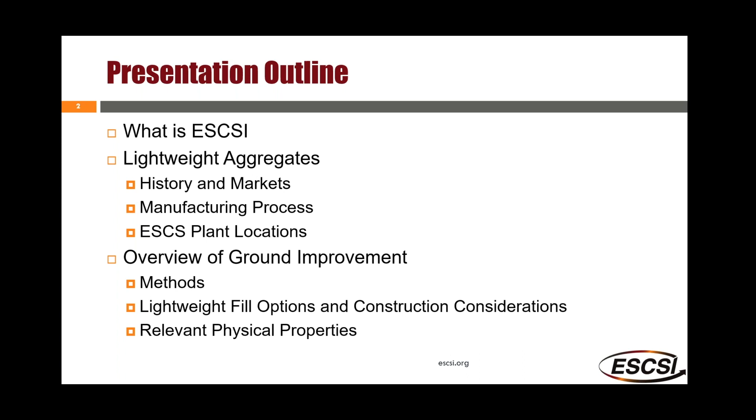The presentation outline consists of the following. We'll talk a little bit about ESCSI and what the organization is. We'll discuss lightweight aggregates in particular, their history, and the markets in which ESCSI members participate. We'll talk about the manufacturing process and show you a map with some plant locations. After that, we'll segue into a very general overview of ground improvement, the methods available in the market today, lightweight fill options available as tools to solve your challenging site conditions, and we'll talk about the relevant physical properties of each.

After that, I'll segue to David's portion, and he will give us an overview of the MSE market from Tensar's perspective. He'll talk about MSE structures, the types, spacing options, and specifically how a lightweight fill or lightweight aggregate can impact an MSE design if it's needed for bearing capacity or settlement concerns. So hopefully that sounds good to everybody.

A little bit about ESCSI. It's the acronym for the Expanded Shale, Clay, and Slate Institute. It was founded in 1952 as the trade association for manufacturers of rotary kiln produced expanded shale, clay, and slate lightweight aggregates. Its primary mission is to sponsor research and develop marketing and technical collateral used by engineers, contractors, and owners on the benefits of lightweight aggregate solutions. Many of our members are active in key organizations such as ACI and ASTM, with many participating on relevant committees within those organizations.

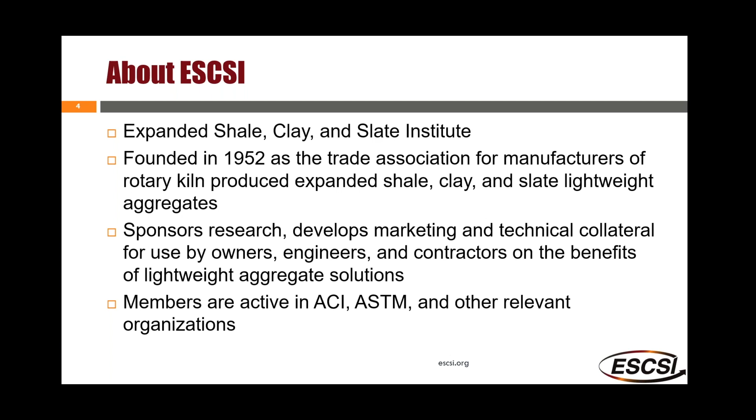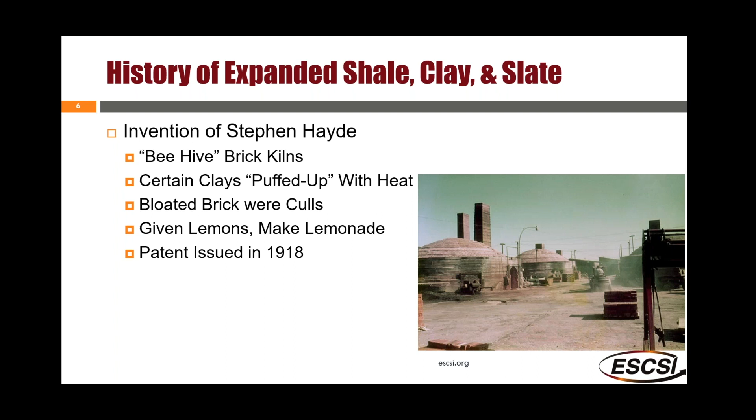ESCS material, or expanded shale, clay, and slate—I'll interchange those terms in the presentation—is an invention of Stephen Hayde. Its roots are in the brick industry. A little over 100 years ago, Stephen Hayde was making brick in a beehive kiln like you see here. Occasionally, when he took the brick out of the ovens, he would get something that looked like this. A bloated brick is not something you want if you're in the brick business.

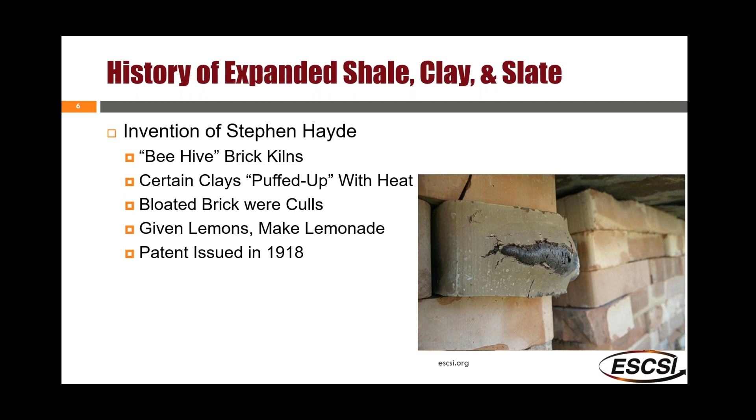So those were culls that he crushed and sold to local concrete producers. Ultimately, they found that the finished product made with the crushed, culled, bloated brick weighed less. So Stephen Hayde made some hay out of this, and he decided to intentionally make bloated brick, quote unquote, and created a method to do so. He studied time-temperature relationships and discovered that keeping the material stationary, like in a beehive kiln, wasn't important. He determined using a rotary kiln was the best way to make consistent product.

Over the years, there have been significant improvements to the process, with automated controls that now produce product with greater consistency, and not the least of which is much improved operator safety.

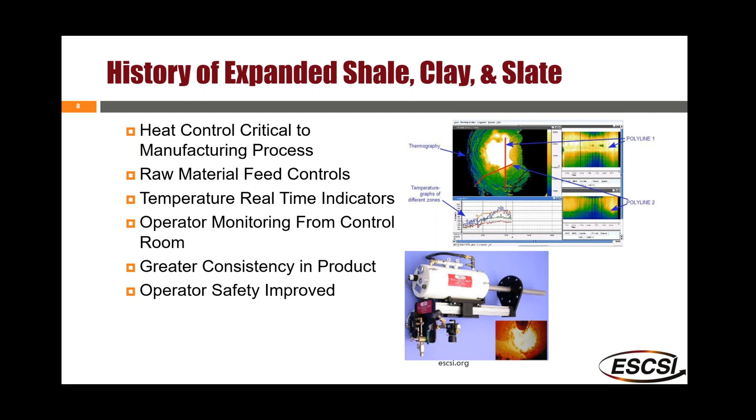Stephen Hayde received his patent in 1918, in the middle of World War I. At that time, he gave the U.S. government the rights to the patent so they could develop lightweight concrete for ships due to the shortage of steel at the time.

In World War II, the same thing happened. There was another steel shortage, and consequently, more concrete ships were produced.

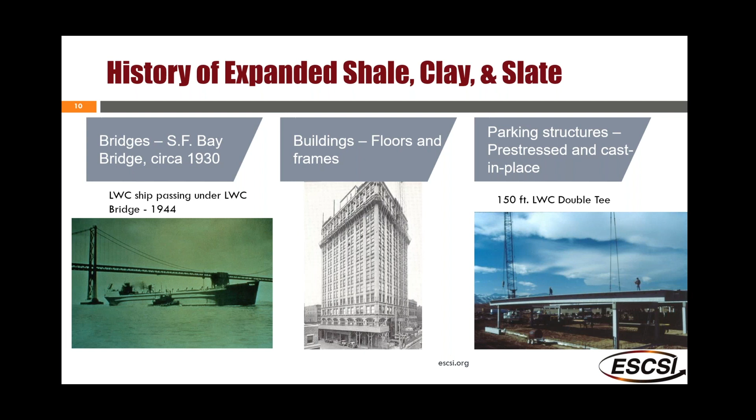Over the years, other markets developed. Concrete masonry began in the 50s, and today is still the single largest market for lightweight aggregate in the country.

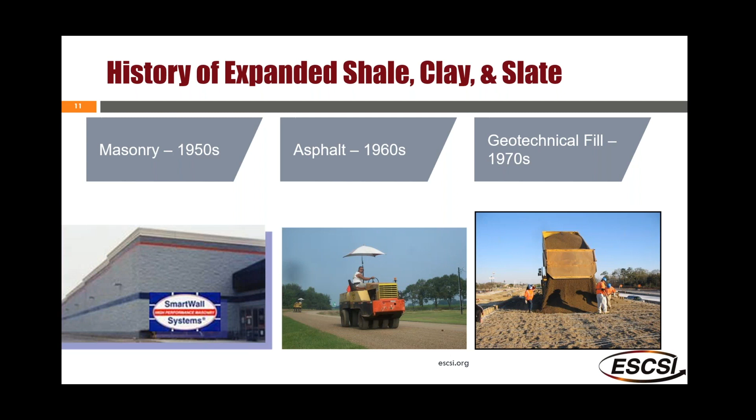In the 60s, it was used in asphalt applications and hot mix asphalt at that time, but today the primary asphalt use is for pavement preservation through chip seal applications. And in the 70s, it began to be used for geotechnical fill applications, and obviously that application is the focus of this presentation today.

So wrapping up this summary of ESCS traditional markets, a significant portion of the annual production goes into concrete and concrete masonry applications, where we routinely support the production of lightweight concrete mixes with very high compressive strengths.

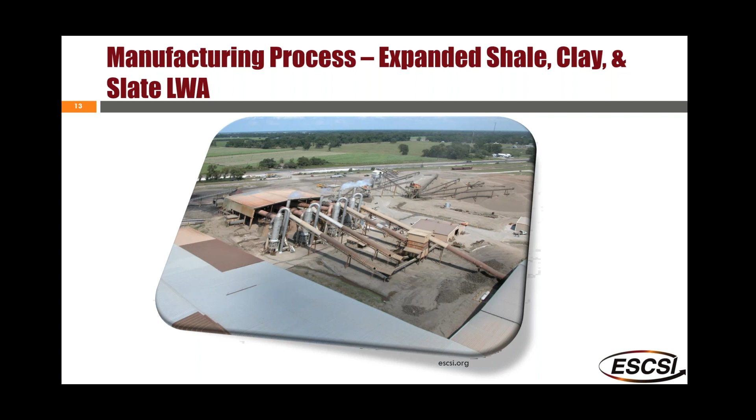Focusing now on the manufacturing process of expanded shale, clay, and slate lightweight aggregate, it's pretty straightforward. The raw materials are excavated and harvested, and they're typically brought to some sort of storage area that's usually covered to keep the material as much out of the elements as possible, especially in the wintertime.

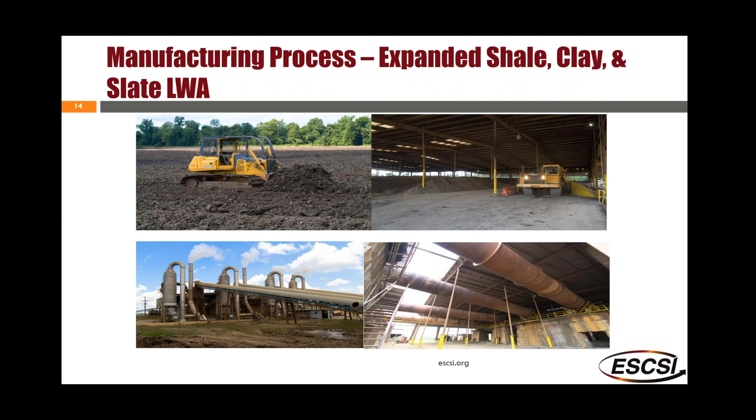At that point, it's fed into a series of conveyors that bring the raw material up to the entrance to the rotary kilns. This photo shows a shot of a typical 4-kiln operation.

Inside the kiln is where all the magic happens. The material is heated to around 2,000 degrees Fahrenheit. At this point, the material bloats or expands, and the particles end up with a lot of air voids inside, and that's what makes the product lightweight.

At the end of the process, you end up with a ceramic material that's very strong, durable, and environmentally inert, and has a low density as well.

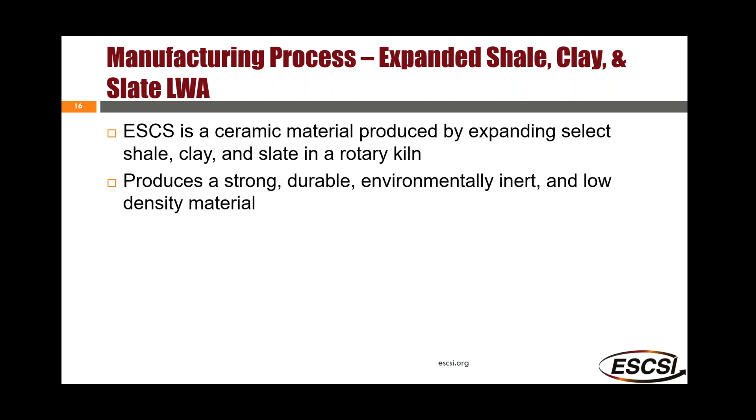All these products and methods and technologies are summarized in the Federal Highways Ground Modification Method reference manual. It's a free download, so if you don't have this, it's an excellent reference, and I suggest you get it.

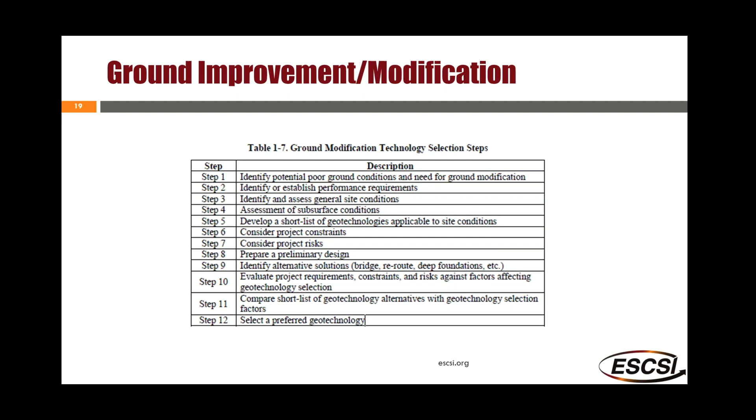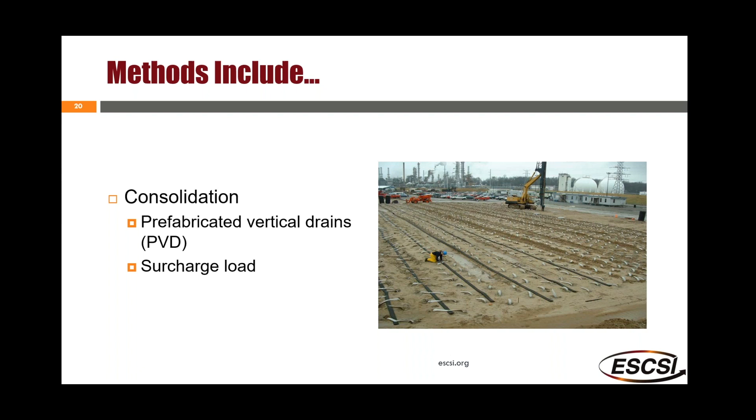Some of the methods available, in summary, include consolidation, which usually takes the form of prefabricated vertical drains and an accompanying surcharge load. Chemical stabilization is another option, and that commonly involves soil mixing.

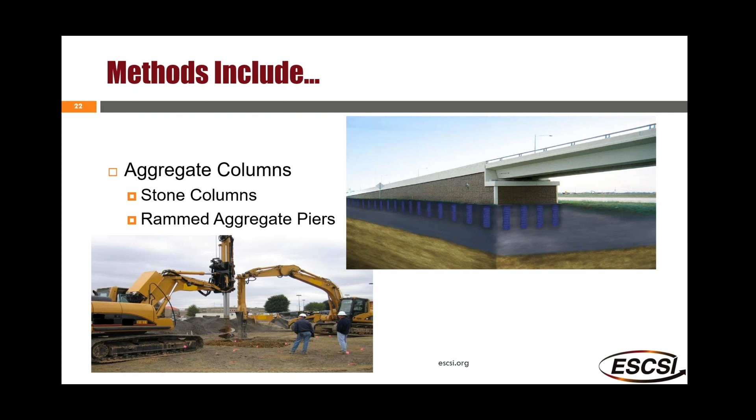Aggregate columns or some sort of intermediate foundation system, such as a rammed aggregate pier or a stone column. Densification, which is typically vibro compaction and deep dynamic compaction. And load reduction, which is where lightweight fill materials fit.

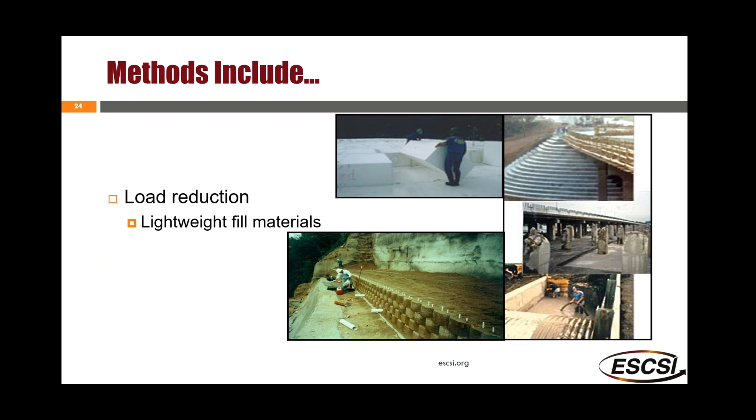Reinforced soil structures are another ground improvement method, and these typically take the form of mechanically stabilized earth slopes and walls. David's portion of the presentation will take a deeper dive into these applications.

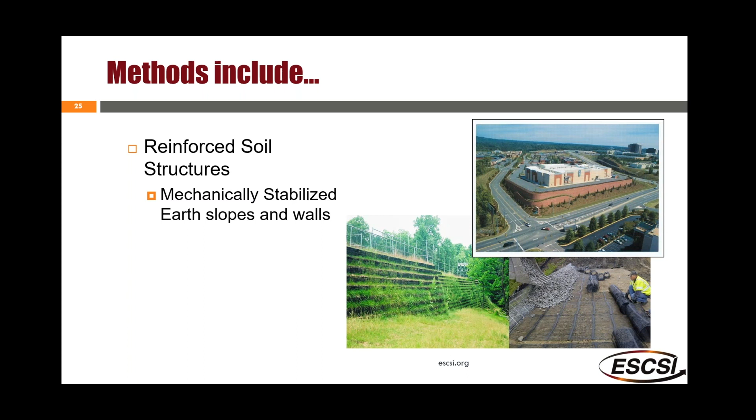So using one or more of these methods, you can increase bearing capacity, attempt to control vertical and lateral deformations, reduce imposed loads, and increase lateral stability.

This chart summarizes most of the lightweight fill materials available on the market today, and generally their range of unit weights. As you can see, I put ESCS materials at the top of the list, and they tend to be the heaviest of the lightweight fill materials on the market today. But they offer some construction considerations that I'll discuss a little bit later.

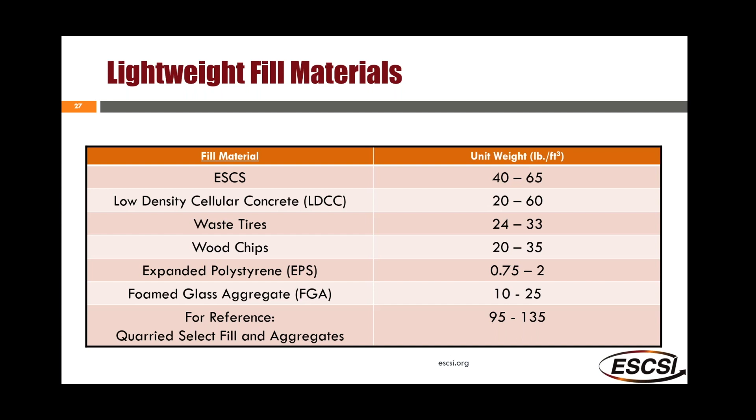Among the more common players are low density cellular concrete, expanded polystyrene, and foam glass aggregate, which is a relatively new player in the market today. You can see the unit weight ranges for each one of those.

Taking a brief look individually at a few of the lightweight fill options on the market today. Expanded polystyrene is one option. It's a plant manufactured material, usually in 6x3 by 1.5 foot blocks, with unit weights that range from 3/4 to around 2 pounds per cubic foot.

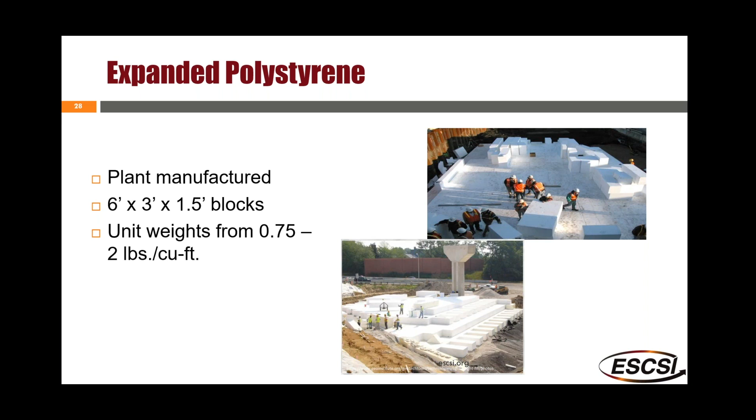Some construction considerations for this option include avoiding continuous vertical joints, so the blocks need to be laid in a running bond, similar to the way you do a brick veneer. You use a mechanical connection between the blocks for shear transfer, so that has to be installed. And you should cover the EPS with a suitable hydrocarbon resistant membrane or some sort of impervious cover to limit damage in the event of a hydrocarbon exposure, and cover it as soon as practical to prevent displacement by wind or water.

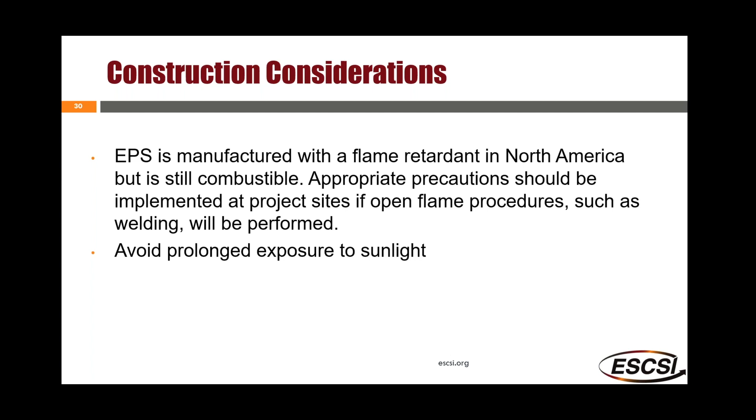Another thing to consider is EPS is manufactured in North America with a flame retardant, but it's still somewhat combustible. So open flame procedures such as welding should be carefully monitored in and around an EPS embankment.

As I mentioned earlier, foam glass aggregate is a relatively new player in the lightweight fill market. Although it's not new internationally, it was developed in Germany in the 80s and started being used in Norway in the 90s as a thermal barrier in roadways.

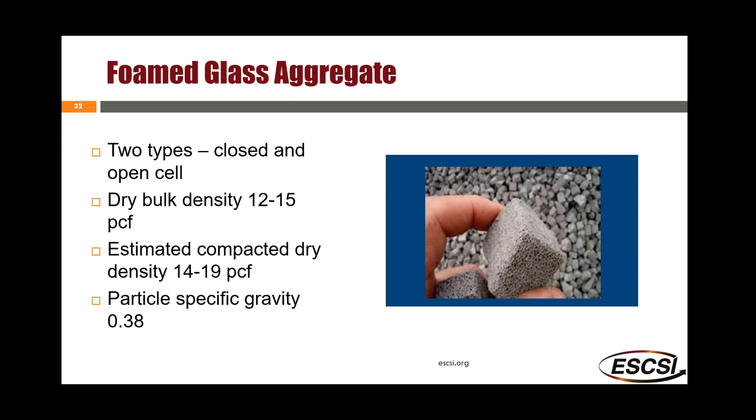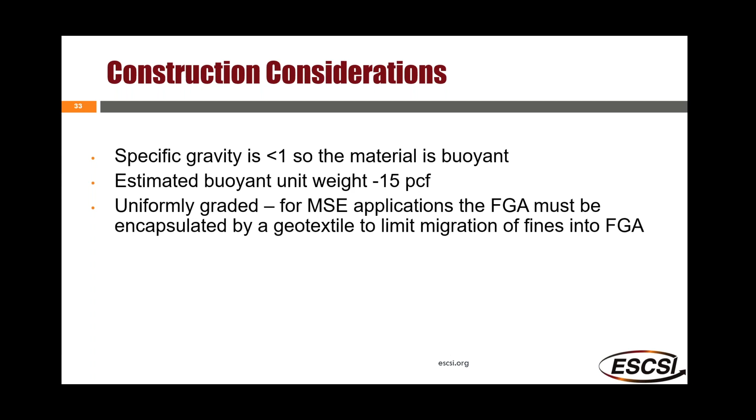It has a dry bulk density of around 12 to 15 PCF, with estimated compacted dry densities in the 14 to 19 PCF range, and particle specific gravities are less than 1, so the material is buoyant. It's also commonly uniformly graded, so for MSE applications, foam glass probably should be encapsulated or covered with a non-woven geotextile to limit any potential migration of fines.

Another lightweight fill option is low density cellular concrete, commonly abbreviated as LDCC. It's a job site produced material that's a water cement slurry with a foaming agent. There's no sand or gravel in the mix.

So the water cement slurry, after the addition of the foam, the cementitious material encapsulates the foam air bubbles, and when the foam dissipates, it leaves a cellular concrete pore structure when it's cured.

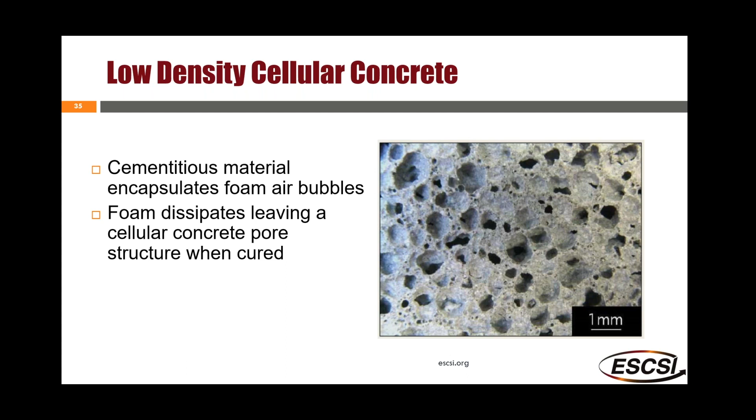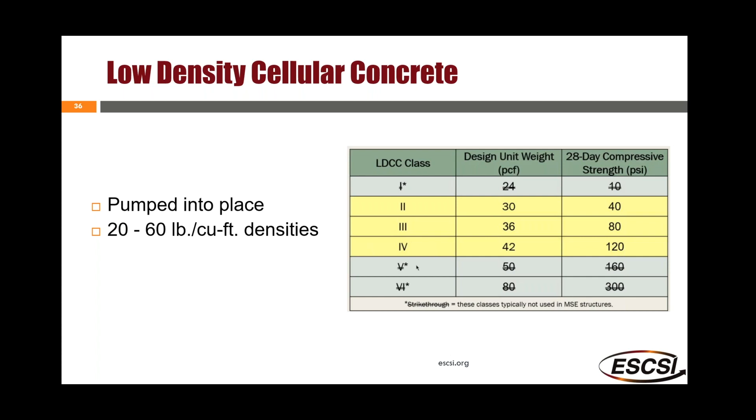The material is pumped into place, which can have some advantages, especially in high density urban locations. Common ranges for MSE structures or for unit weights are roughly 30 to 42 PCF. As you would imagine, low density cellular concrete is fairly cement intensive, so for a 30 PCF cast density, there's a little over 500 pounds of Portland cement per yard of LDCC.

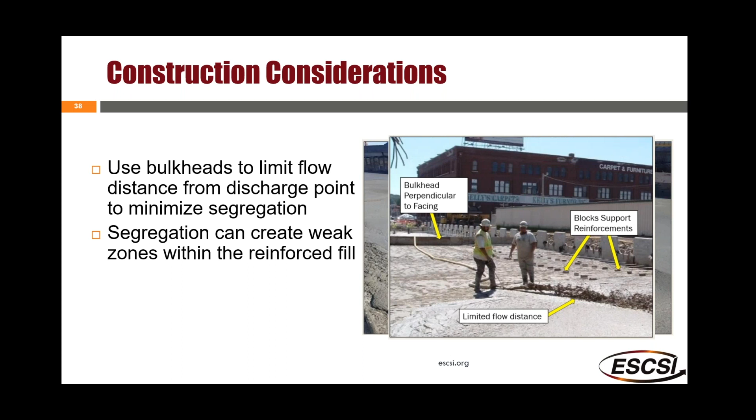Some construction considerations using this option are probably pretty obvious. Bulkheads need to be used to limit flow distance from the discharge point to minimize segregation, which can create weak zones within the reinforced fill that should be avoided. A staging area is required for batching, mixing, and placing. The solution is fluid and almost always requires some sort of formwork.

The lift thicknesses need to be such that workers can shape the surface while wading in the mix, and you should obviously allow drying time between lifts. So this brings us to ESCS lightweight aggregates.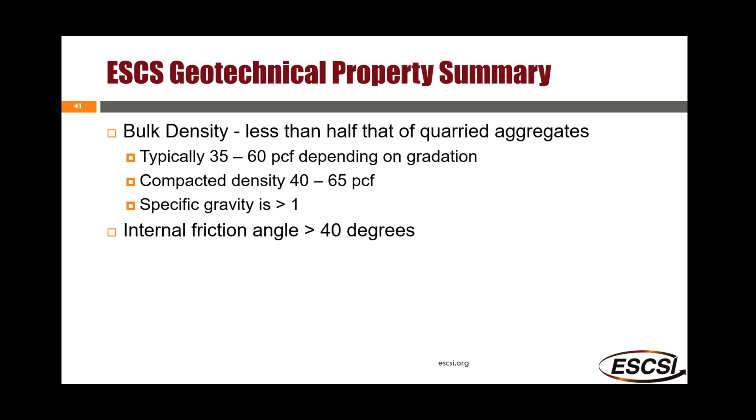It almost always tests greater than 40 degrees in direct shear. ESCS material is probably one of the heavier lightweight fill materials available on the market today, but it has considerable construction advantages. It can be trucked to job sites in tandem or trailer dump vehicles. Grading contractors can use their conventional earthwork equipment to handle and place the material. Generally, very little compactive effort is required to achieve a suitable density. And probably the best thing about it is there's no specialty contractor that's necessary.

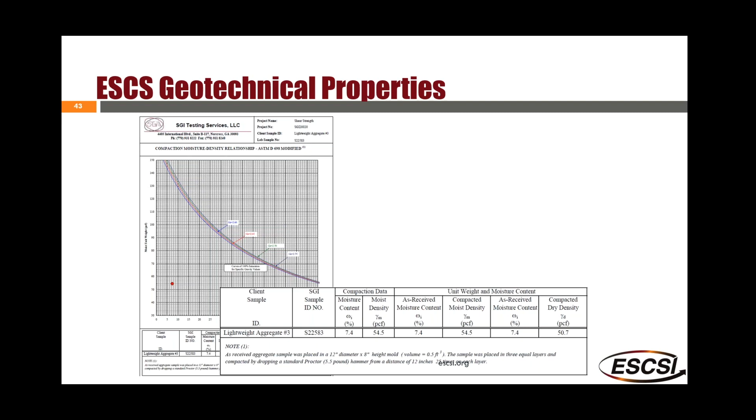The material is very durable. LA abrasion results for this particular sample was 34% loss. It's common to see AASHTO specification requirements of no more than 40% loss. So this ESCS material would fit in that category very nicely.

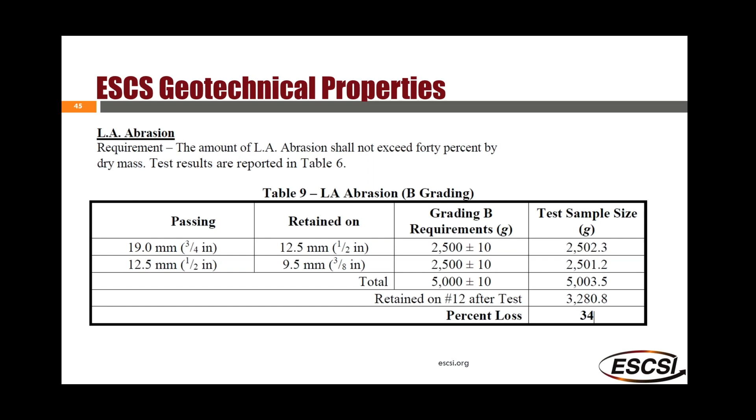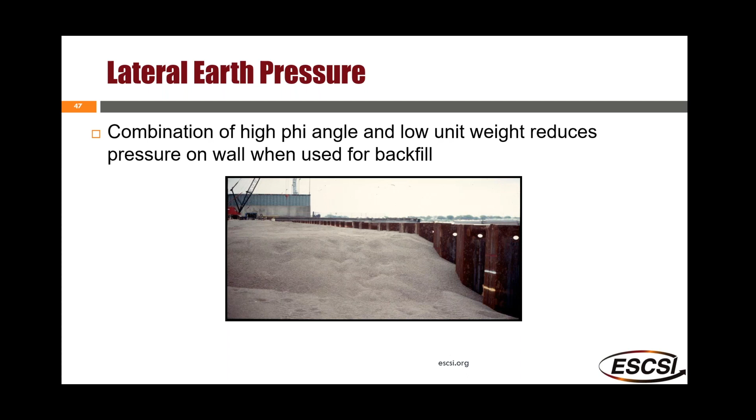The combination of high internal friction angle and low unit weights considerably reduces the lateral earth pressures on walls. Running through a calculation of lateral earth pressure, it's a function of the material density, the wall height, and a K value, which is a function of the internal friction angle. Comparing a select fill at 115 PCF with a phi angle of 30 degrees to a lightweight aggregate with a density of 55 PCF and a friction angle of 40 degrees, you get one-third of the lateral earth pressure compared to a quarried select fill. That can be significant when the design of components is taken into account.

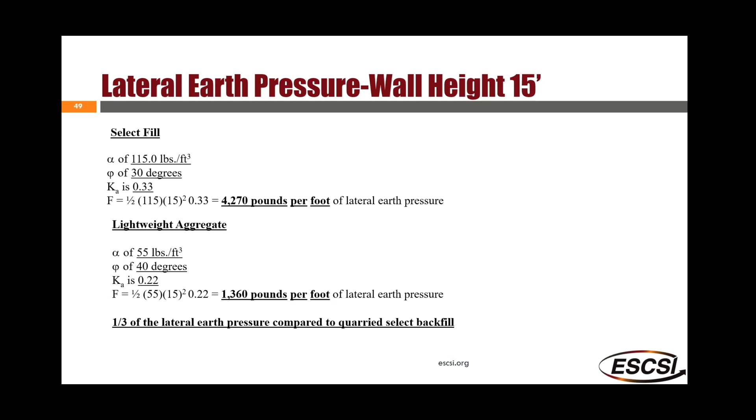Same is true for applied vertical stress. You reduce the weight, you reduce the applied vertical stress. In this example, comparing a 55 PCF lightweight aggregate fill to a normal fill, you end up with less than half of applied vertical pressure, which can be significant if there's a bearing capacity issue.

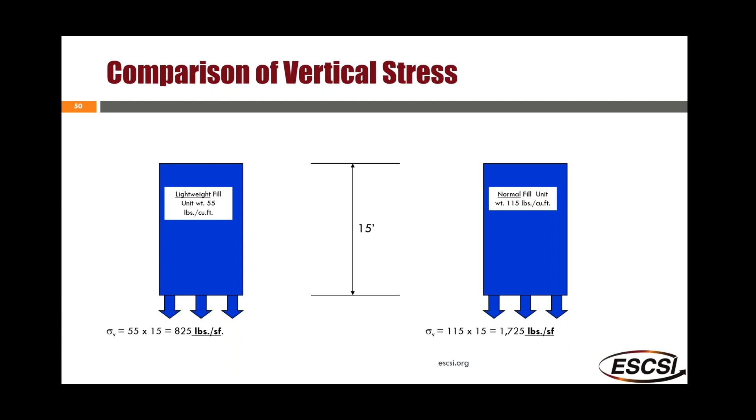I want to segue now to David's portion of the presentation. David has had multiple roles with Tensar, and he's currently one of their area engineers, primarily covering the southern U.S. He has significant experience in Tensar's grade separation market. Prior to joining Tensar, Dave wore a couple of hats. He was president of Specialty Civil Designs, which focused on MSE designs and ground improvement, and he was also president of Terraform, a construction company focused on foundation improvement and retained earth structures. So, David, it's all yours.

So, Abigail, if you could switch us, that'd be great. Excellent. Well, we appreciate everybody tuning in, and we hope that you take something away from this.

What I'm going to focus on is the use of alternate backfills and geotechnical properties for MSE structures. To expand on what Jack mentioned about myself, I am the area engineer for Tensar in the South US. I've had over 13 years with Tensar spread over two tours of duty, once back in the early 90s, and I've been back with them now for about 8.5 years. 17 years in the design build business, and you can tell by all the gray hair I have that it's a trying business. I've been a PE for over 38 years and currently licensed in 13 states, mainly in the Southeast.

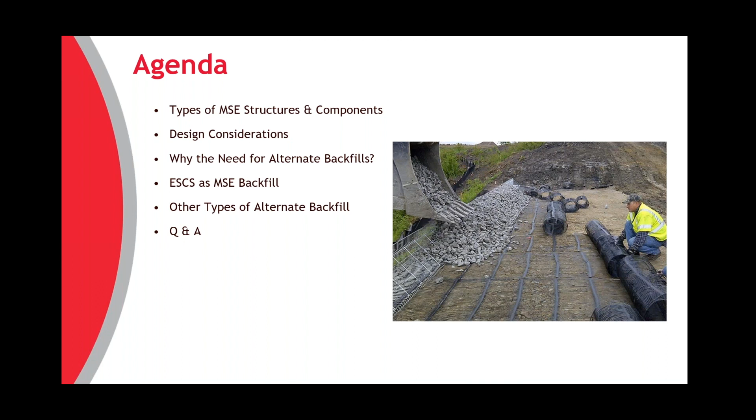So let's get started by taking a look at what mechanically stabilized earth systems are. If you're in the DOT arena and you mentioned MSE walls, they're typically these walls. It'll typically be a concrete panel wall, as you see in the upper left here.

However, all of these structures are really considered to be mechanically stabilized earth systems. The one on the right here is a segmental block system, often referred to as an SRW wall. Sometimes people call it a keystone wall. But anyway, they're dry stack blocks, typically 8 inches high and 18 inches long as the standard size. There are a number of different sizes depending on the manufacturer. You have some type of soil reinforcement, mainly geosynthetic, but it could be something other than that.

And then you go to temporary walls. You see this a lot in highway construction, where they have temporary grade separation where they're trying to raise one side of the road and maintain traffic on the other. These are typically a wire form wall. They've got welded wire forms that form the face, and of course the soil reinforcement behind it. And then the face is wrapped with some type of geosynthetic.

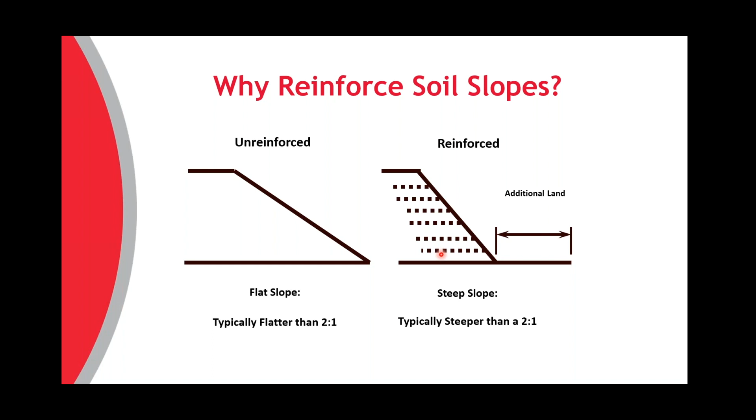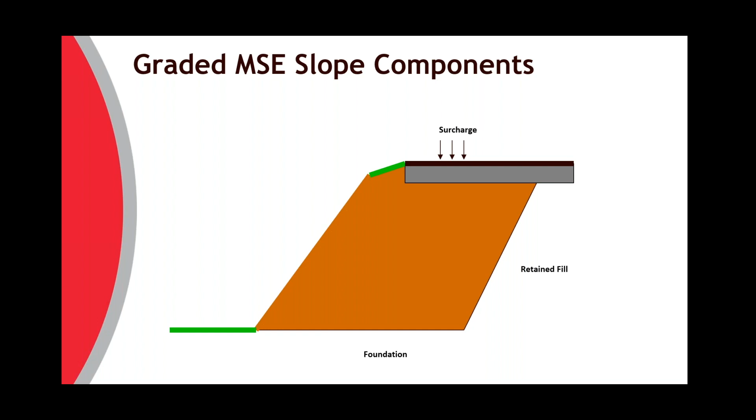Let's look at the nomenclature or the components that make up a graded MSE slope. First, you have your foundation materials, and that's typically determined by your geotechnical engineer. You have retained fill, and then you have the reinforced backfill, which is in the reinforced zone.

You'll have primary reinforcement, which is normally a uniaxial type geosynthetic material. Normally these are placed no more than 4 feet vertically apart. The length of these, general rule of thumb, is about 1 times the height. So if you've got a 10-foot high slope, you'd have a 10-foot long primary reinforcement. Now, again, this can vary depending on your foundation materials or your loading at the top, but a general rule of thumb is about 1 to 1.

And then we add secondary reinforcement, which are lighter weight, lower strength materials at the face to control superficial stability. These are normally about 4 feet in length and placed about 1 foot vertically apart up the slope, just to control superficial stability of the slope between your primary grid layers. And then, of course, you can put an erosion blanket on the face and vegetate. This is one of the least expensive types of MSE structures that you can construct.

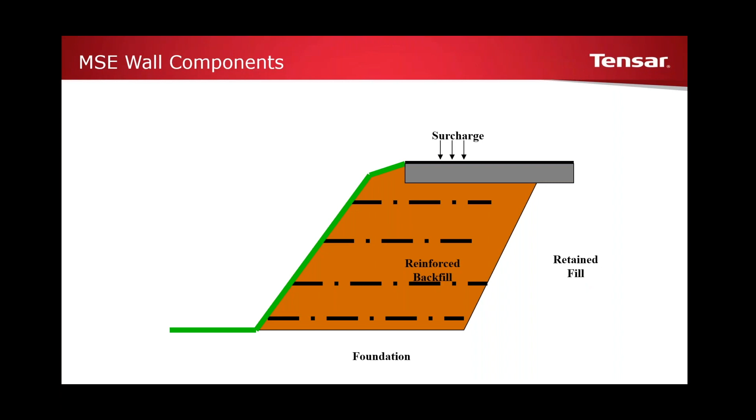So let's look at MSE wall components. The nomenclature is essentially the same. You have your foundation, your retained fill, your reinforced backfill. The main difference is the slope face angle. The slope face angle can vary somewhat, but typically it's considered a wall if this face angle is greater than 70 degrees. If it's less than 70, it's considered a slope.

The geogrid lengths, or the reinforcement lengths, are somewhat less. Minimum lengths are 7/10 times the height, so a little bit shorter than a slope. And again, they can vary depending on the soil properties of your foundation and your fill materials.

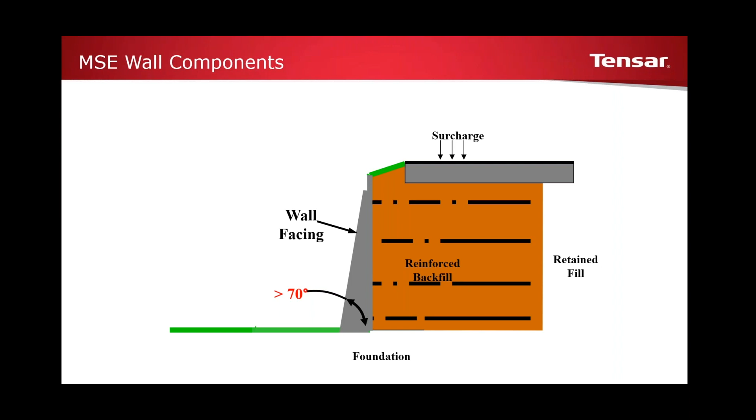So let's look at design requirements. What's required for the design of a reinforced slope? First, you have to be concerned with internal stability. Do you have enough tensile capacity in these geosynthetic components to make the slope stable? That's called internal stability. Then you have compound stability, which involves...

It includes the geogrids or the reinforcing, but it also includes the material behind it as well. So you have to make sure you have adequate compound stability. And then there's global stability, or what we call deep-seated stability, which evaluates failure surfaces falling behind the soil reinforcement. And then, of course, direct sliding of the reinforced mass.

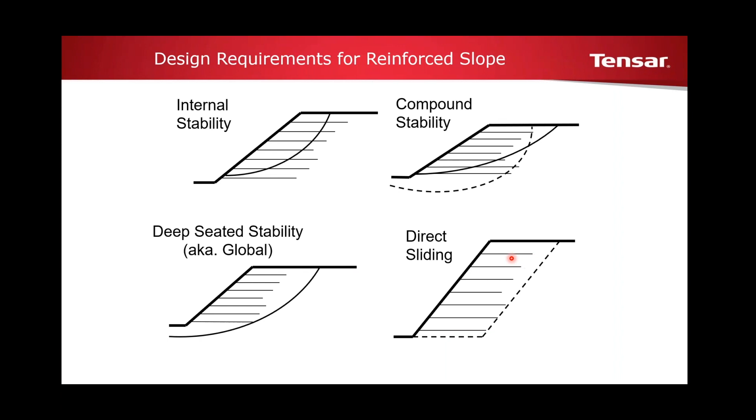Okay, so for walls, there are two mechanisms that you have to be concerned with. It's internal stability. And for that, you have to be concerned with the geosynthetic strength. It could be a geosynthetic, it could be steel, depending on the system. You have to be concerned with pull-out capacity of your soil reinforcement. And then connection strength of the reinforcement to the facing materials.

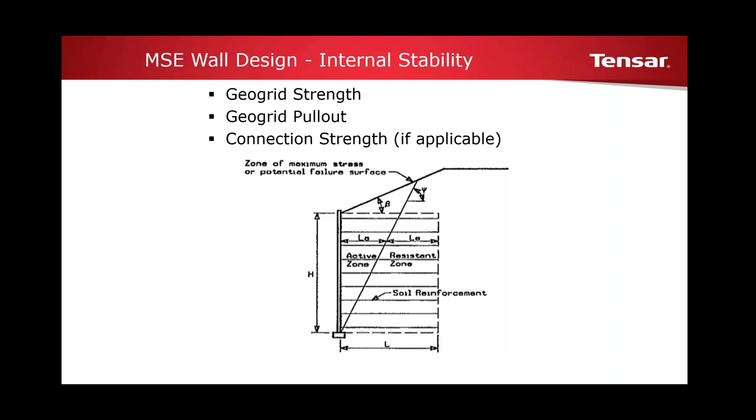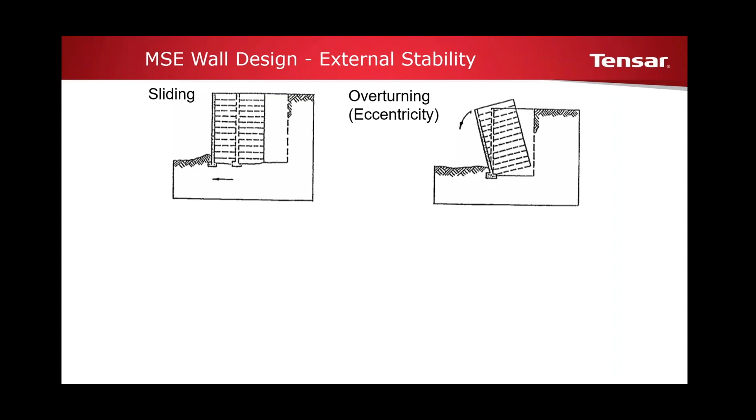The other mechanism would be external stability. And by that, we refer to sliding of the reinforced structure, overturning of the structure, bearing capacity, and of course, global stability.

Okay, so how do these soil properties affect the MSE structure with regard to reinforced fill? Well, a change in friction angle of only 2 degrees of your reinforced backfill can increase or decrease the load by about 10%. So this can be very significant in determining what type of soil reinforcement you need, what the length may be in the MSE structure.

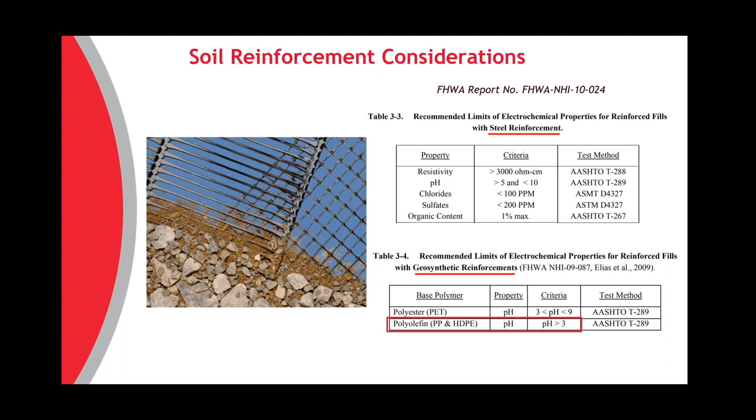Okay, so let's switch gears again. Let's take a look at the condition of America's infrastructure. Every 4 years, ASCE evaluates the infrastructure of the United States. They just completed this study this year, 2021, and the overall grade is a C-.

Now you look at that and you say, well, gosh, that's not very good, but it's actually up from a D+, which was 4 years ago. These are the various items that they look at: aviation, bridges, dams, etc. In this report card, the values range from a B in rail to a D- for transit. Most all of these are C's and D's, with no A's anywhere.

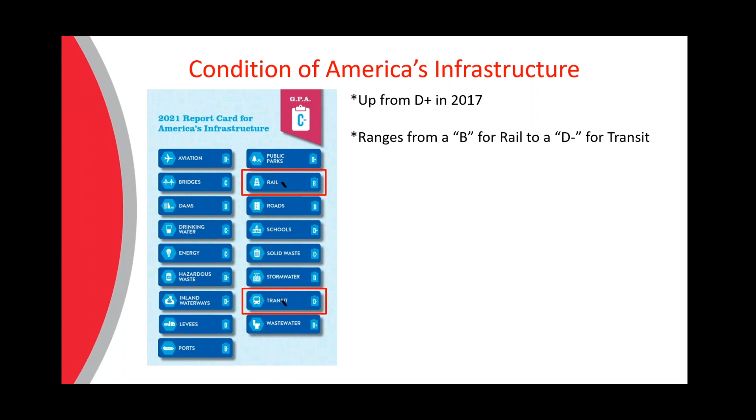So what do these grades mean? Well, a grade of C indicates that it shows signs of deterioration. It requires attention. They have significant deficiencies in condition, functionality, and increased risk.

Grades of D mean they're mostly below standard. They're approaching the end of their service life, and there's a strong risk of failure. So that doesn't give you a real warm, fuzzy feeling the next time you're on a high-speed train somewhere when you have a rating of D-.

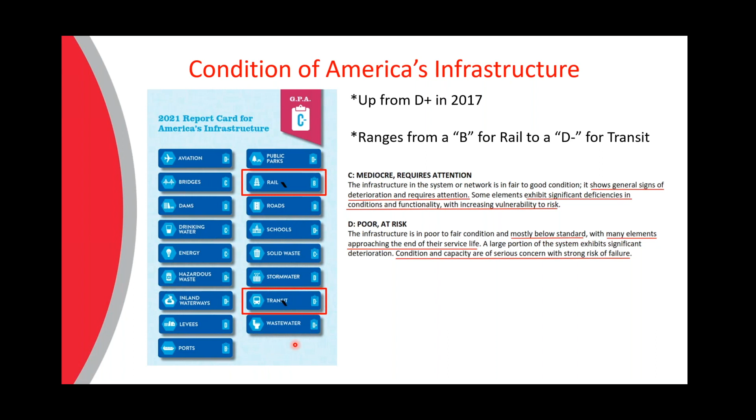ASCE also evaluates the funding estimate to bring our infrastructure back up to acceptable levels. This table is from 2020 to 2029, and these values are in billions. So this is $5.9 trillion in order to get our infrastructure back where it needs to be. Before the infrastructure bill, it was currently funded at about 3.3, which leaves us a funding gap of about $2.6 trillion.

Essentially what we're doing is paying about half of the infrastructure bill to get our systems back up to where they need to be. Now, the infrastructure bill will help that somewhat, but we're still not going to get to the $2.6 trillion deficit that we need to get everything back up to where it needs to be.

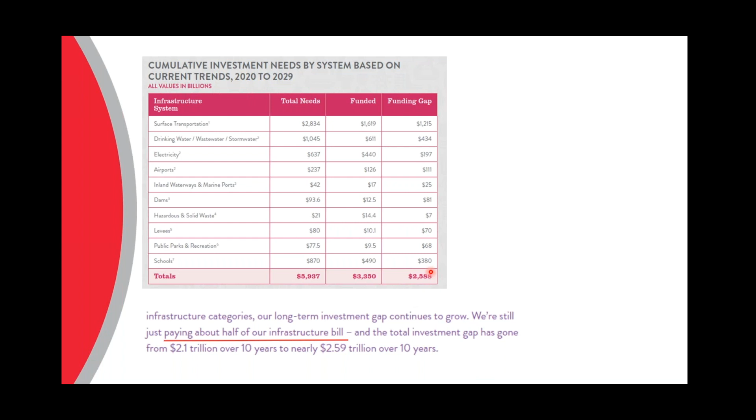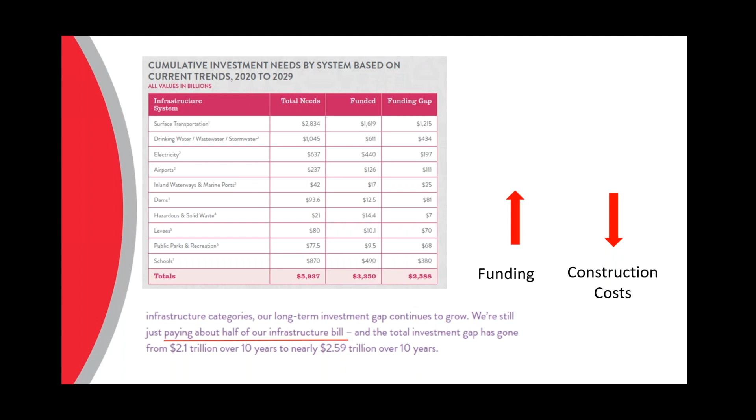So with this, what can we do? Well, you either have to increase funding or you have to decrease your construction costs. And one way of doing that is to look at alternate types of backfill materials.

In terms of aggregates, the U.S. doesn't have an endless supply of affordable quality aggregates. USGS did a report years ago, and they estimated that it would take about a 70% increase in aggregate production just to get our infrastructure back where it belongs. Now, 70%, that's huge.

Some of the aggregate development is prohibited by encroachment. And by encroachment, I mean building of subdivisions or cities expanding their city limits in areas where backfill materials are obtained. Some aggregates don't meet the quality requirements, such as the electrochemical requirements that are put forth. Also, aggregate is pretty widespread, but it doesn't occur everywhere in the United States.

This is a map, again, by the USGS that indicates areas of the country where you have limited occurrence of aggregates. You'll notice these are along the Gulf Coast, up the Atlantic coast, and pretty much in the upper Midwest area. So what does this mean? Well, haul distances obviously increase the cost of your backfill materials. It's estimated that haul distances of 30 to 50 miles can double the cost of aggregates.

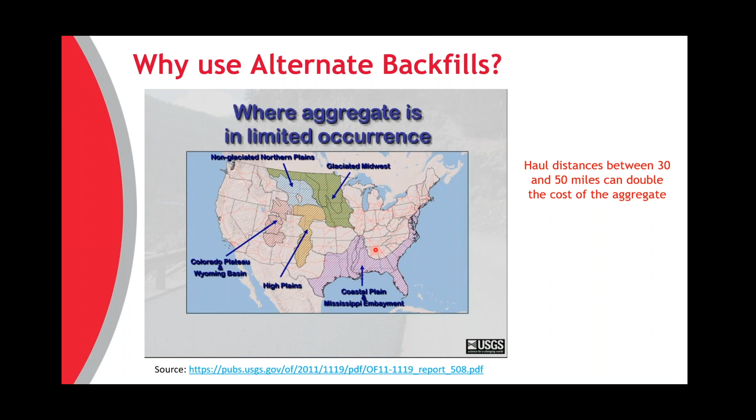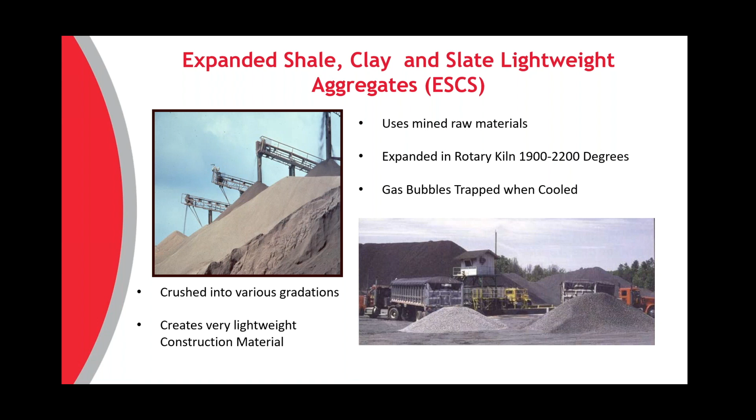ESCS materials, as Jack mentioned, are becoming more and more available and used more and more. As he talked about, they use raw materials, heat them to high temperatures to expand it, and then when it cools, it traps these gas bubbles and makes it a very lightweight aggregate. It's crushed into various gradations, and it creates a very lightweight construction material, which, as Jack mentioned, is about half of what a quarried aggregate would be.

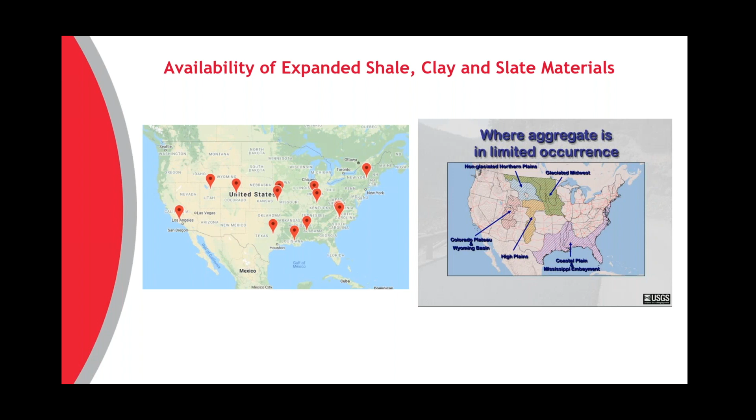Okay, so ESCS as an MSE backfill material - advantages: it's got a very high shear strength, it's lightweight, which can accomplish or overcome some of your foundation problems if you have those, and it also meets electrochemical properties. If you recall this slide from earlier that showed the properties, the shear strengths and the unit weights of typical aggregate materials, the ESCS, again, is higher in shear strength generally, and about half the unit weight.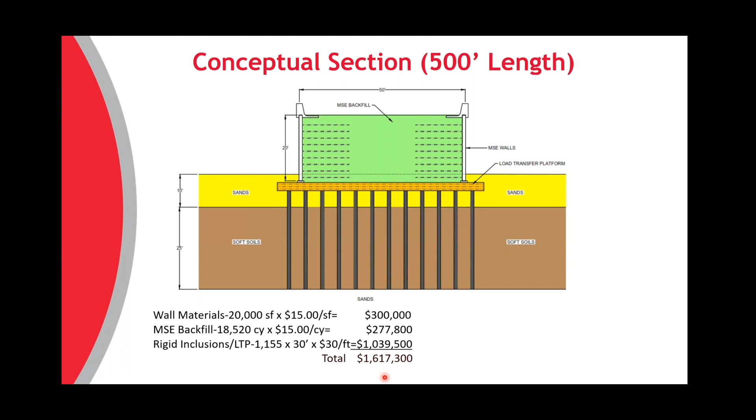The value proposition of using a lightweight backfill material in this reinforced zone is that you can eliminate the load transfer platform and the rigid inclusions. The change to this lightweight material, let's assume, would eliminate your bearing capacity and settlement issues.

So why is this important, or how do the numbers work out? As mentioned earlier, the unit weight and shear strength of this material can decrease the lateral load and soil reinforcement requirement. So the wall backfill material cost goes to $12 a square foot from the $15 we had earlier. The backfill material cost, the ESCS, can be much higher - let's assume, for instance, in this example it's $60 a cubic yard versus $15 for a normal aggregate. But the big advantage is that you can eliminate the highest cost item, which is the rigid inclusions. By doing this, you come up with about $1.35 million versus about $1.6 million - a savings of about $250,000, or 16.5%. So that can be a huge advantage for using ESCS as a lightweight backfill material.

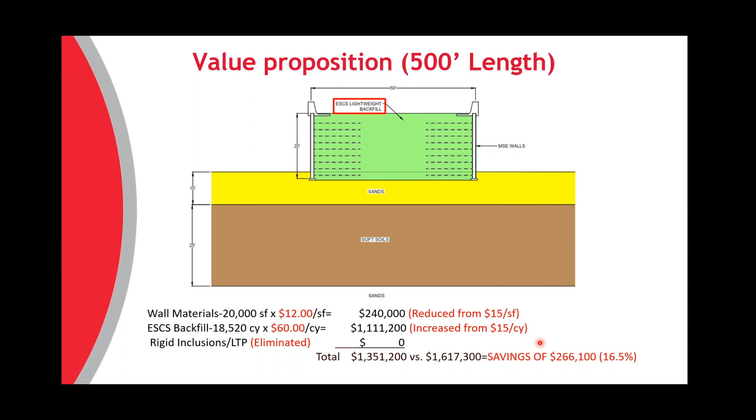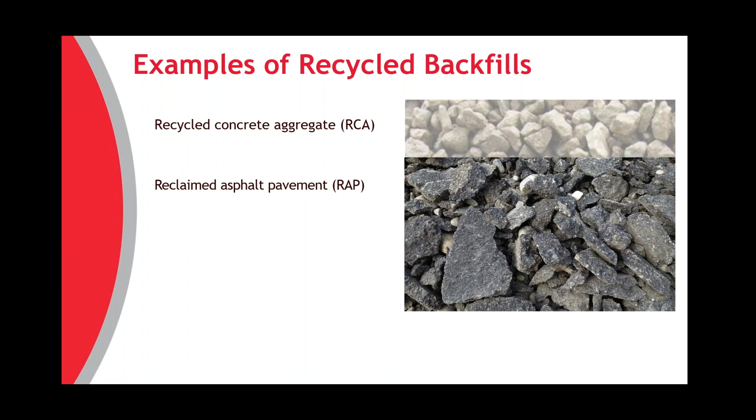Some other examples of alternate backfill materials that you might use would be some recycled backfills. Recycled concrete aggregate, or RCA, is being used more and more often, and we'll have an example of this in just a minute. Reclaimed asphalt, or RAP, we use this quite a bit in highway construction, not so much in MSE wall construction, but it is being looked at, and we'll take a look at that in just a minute. And then, of course, coal combustion products, fly ash.

So, recycled concrete aggregate - shear strength is pretty much the same or very similar to what a conventional backfill material would be. A crushed aggregate is about 55 degrees, the crushed concrete about 54, so essentially the same strength.

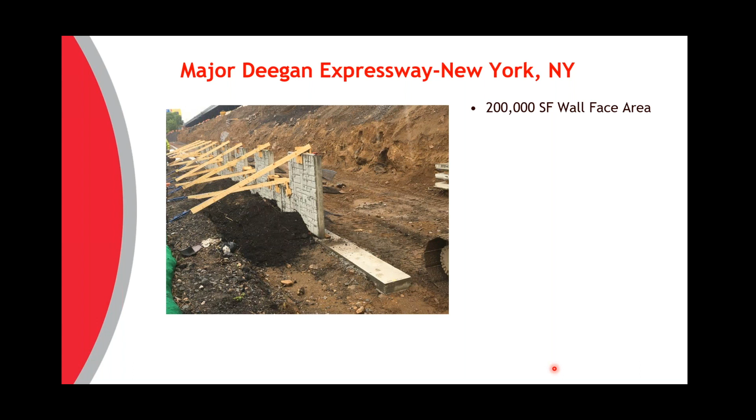To give you an example, this is a project that Tensar was involved in, in New York - the Major Deegan Expressway. About 200,000 square feet of wall face area, requiring 100,000 cubic yards of reinforced backfill. This particular contractor had another large job where they had to demo a lot of concrete, so they were able to recycle that concrete from the other job. They got it approved as backfill for the MSE wall. The advantage of that was a savings of about $4 million.

As you can see, that's a huge advantage in some applications. However, with RCA there are some drawbacks. This picture, though hard to make out, shows calcium carbonate that has blocked a drainage pipe - the fines in the crushed concrete aggregate and water can form calcium carbonate. So the current recommendations, if you use recycled concrete, are to not use it where it's expected to be inundated, such as coastal areas affected by tidal fluctuations; limit the amount of fines to about 10%; and include drainage provisions to prevent water infiltration into that zone. So that's recycled concrete aggregate.

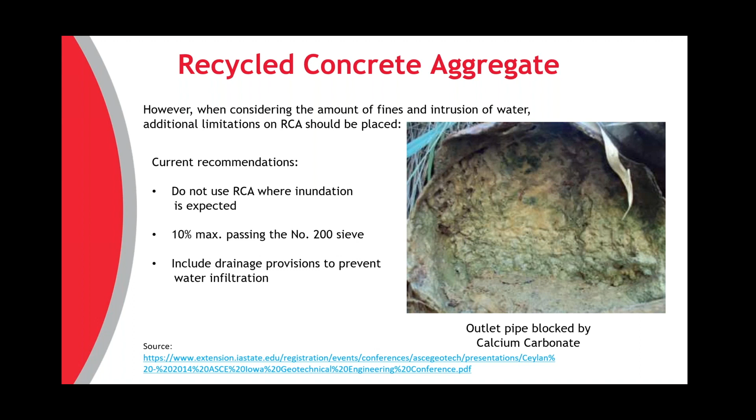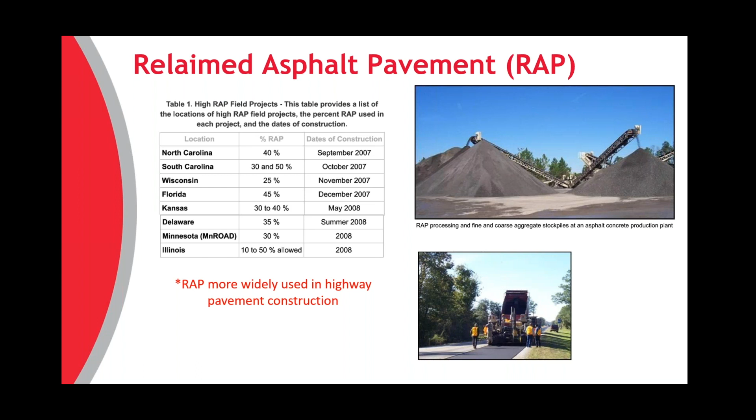It has not been used a lot in MSE structures, but it is being considered. There's currently a study going on by the University of Wisconsin at Madison.

It's a two-phase study. The first phase is completed. They looked at geotechnical parameters of RAP. The second phase, which hadn't been done yet, is to construct a full-scale test and instrument it to see what the effects of using RAP as MSE backfill might be.

The results from the phase 1 test showed very high shear strength, 42.6 degrees for peak strength, but they're concerned about long-term creep effects by using RAP, so they suggested reducing the peak strength to 70%, which gets you down to about 29 degrees, which is kind of on the low end of what you would want to design an MSE structure for. So it remains to be seen whether this is going to be a viable option or not.

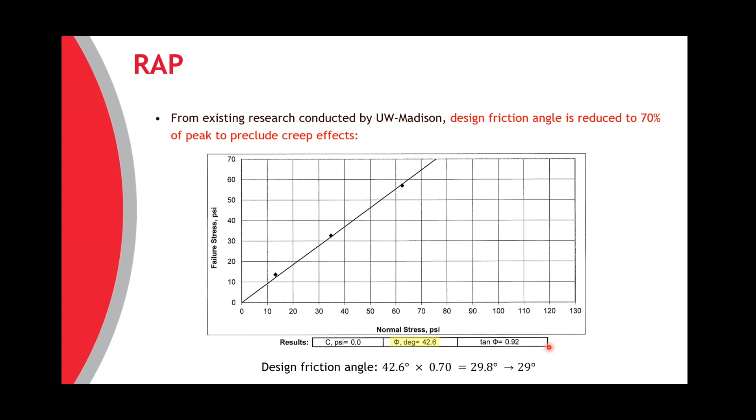Another option, coal combustion products. These are produced by coal-fired power plants. They're basically the flue gas scrubber sludge, or FGD, combined with fly ash and lime to stabilize it. It's produced in a number of locations in the U.S., and it's used mainly in highway construction, but it can also be used as MSE wall backfill.

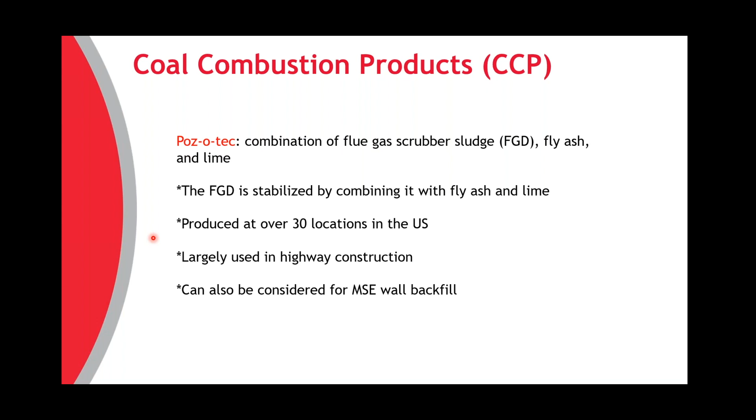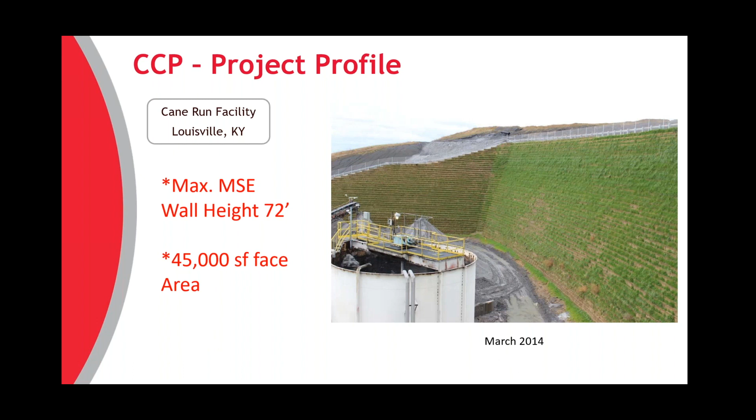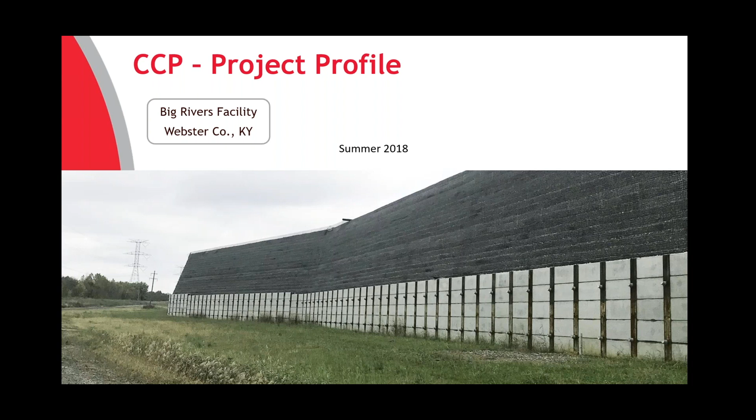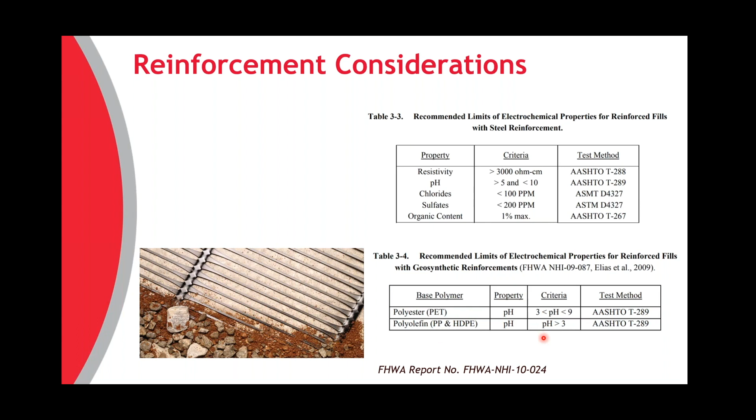Now, reinforcement considerations. We looked at this earlier about the electrochemical properties, and I mentioned pH is a major concern for soil reinforcement: 5 to 10 if you're using steel, 3 to 9 for polyester, and anything over 3 for polypropylene and HDPE. So typical pH values of recycled concrete are greater than 11.

Coal combustion products can be up to 13. So that essentially eliminates steel as a soil reinforcement option, and essentially eliminates polyesters. So you're left with polypropylene and HDPE for these types of applications. That's a very important consideration when you're designing structures using these types of backfills.

So with this, I'm going to turn it back over to Jack to finish the presentation.

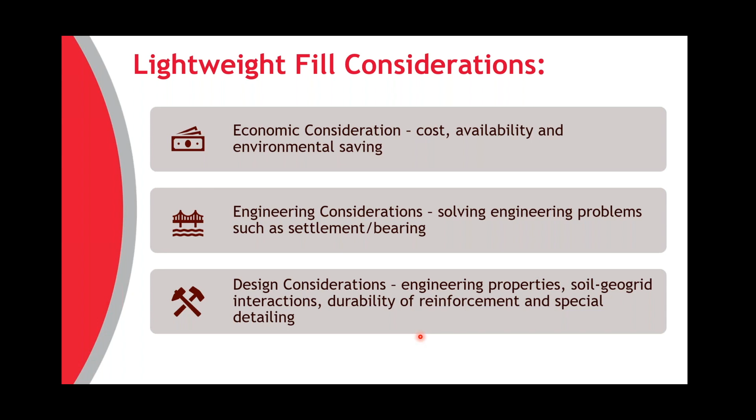You got it, Jack? I do. Thank you, David. Sorry, I had to do a couple of clicks there. No problem.

Appreciate the very informative discussion about the impact of using lightweight fill materials on MSE structures, and the potential to eliminate perhaps riskier ground improvement techniques when lightweight fill materials are used.